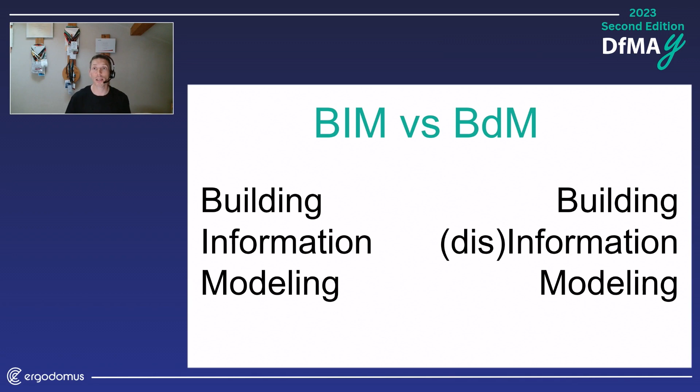DfMA has something behind it, which is BIM, Building Information Modeling, an acronym we're all familiar with. But as my friend Emma from South Africa, who should be here with us today, once told me, BIM is different from BDM, Building Disinformation Modeling. So we need to adopt the digital model, adopt digitization for our structures, push the boundaries, and go for BIM instead of BDM.

Just three more slides before moving to the first speaker of today. When I say digital model, I mean structures, I mean drawings like this one. This is a project we've been working on for many months. It will be one of the biggest mass timber office buildings in the world, in Europe.

It will be about 30,000 square meters, which is about 300,000 square feet. And on this project, we had the opportunity to implement the most advanced digital technologies.

Each element in the BIM model has a name. We can see the assembly sequence, who the producer is, and which truck these elements will be loaded onto. We can check everything, and share this model weeks before having the timber elements on site.

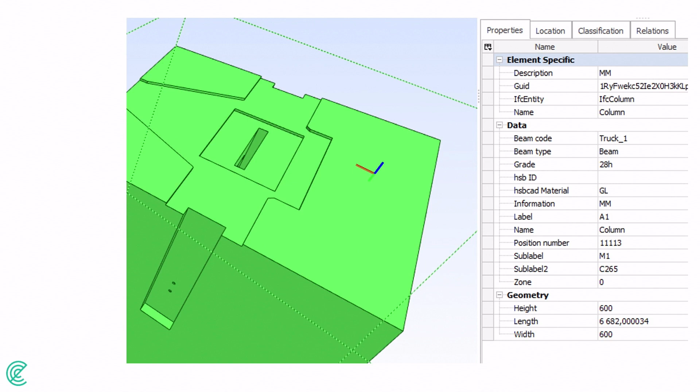We can share this with the designers, with all the other designers, with the developers, with the builders, so everyone knows exactly what they will get on site. No matter how complex the elements are, how big or small, they can check everything deeply and say, okay, this is what I want to get on site.

From the digital model, we quickly move to the real 3D element, which arrives on site a few weeks later. No matter how complex the details are, every single detail is made in 3D.

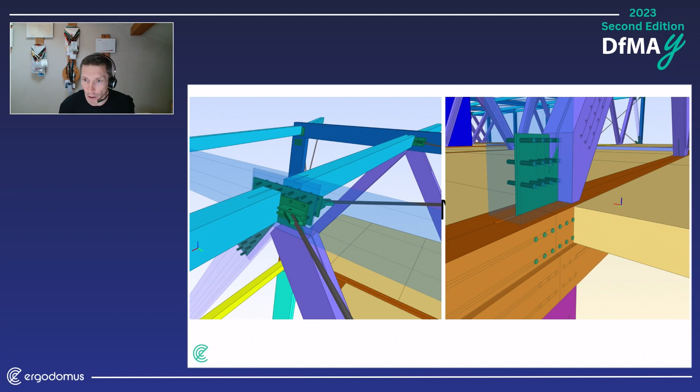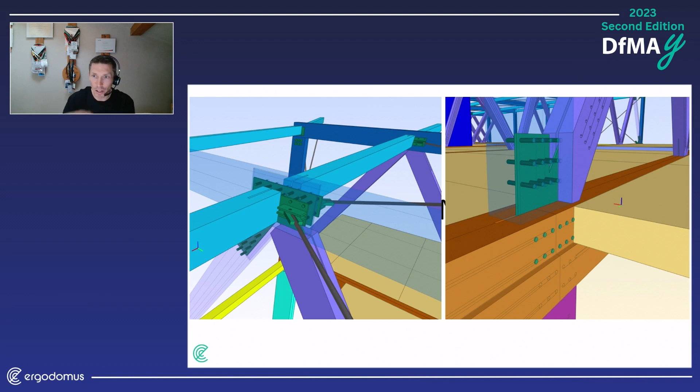This is the most time-consuming part of our job, because we cannot just say it will be something similar to this. Since we create the files for the CNC machines, everything must be much, much more than perfect, because if we draw something wrong, you will get something wrong on site, and we don't want problems on site.

The goals of today, just some of them: Is the building industry ready for the mass timber revolution, the mass timber evolution? Why the digital model? Can we improve the way we design our structures using a DfMA approach? I would like people attending from all over the world to be less skeptical about the use of mass timber, even for high-rise buildings.

One of the acronyms I really like is: what you draw is what you get. Digital model, production with a CNC machine somewhere in the world, and then a very quick assembly without problems. So that is my short introduction.

I don't want to speak more than this, and I want to say one last sentence, written by Albert Einstein: 'The measure of intelligence is the ability to change.' I really believe that thanks to mass timber, thanks to timber, it has really changed things for us as human beings to change. We have the chance to change today, and I hope this conference will convince more people to change the way they build or design.

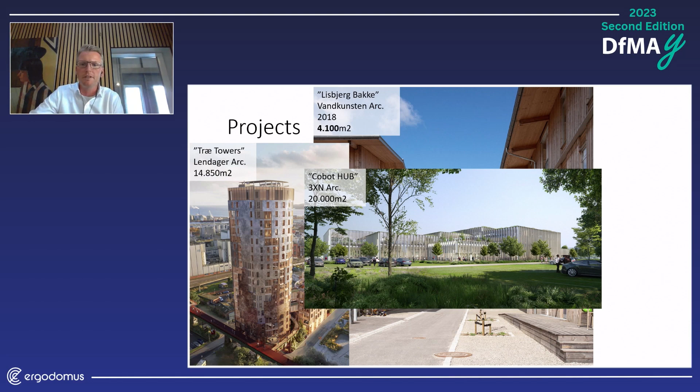Moving on - I have to use the right clicker here - we have this Cobot Hub by 3XN architects here in Denmark as well. It's 20,000 square meters, a hub for robotic technology, based in the center of Denmark, in the city of Odense. That's where Hans Christian Andersen comes from.

Then we have the project Marmormolen, and for the quick people out there, you will realize this is the project that Franco was showing in the beginning of the presentation, the 3D model. I know Franco said it was a bit bigger, because his square meters include the basement that's made in concrete. But the wood part of this is 25,000 square meters of CLT and glulam beams and glulam columns.

This will be a shared office space, with the first floor, the entry floor, being a kind of public space where you have a restaurant, and also the canteen service for the building is located here. This has to do with the fact that this building is located right in front of the waterfront in Copenhagen Harbor, on the north side. It's a pension fund building this project and sponsoring it, you could say.

Now, here we have the Wood Hub by C.F. Møller architects. It's 31,000 square meters and located in Odense, as well as the other project, the Cobot Hub.

This project is interesting, not only based on the fact that it's really big, but this is also where the legislation board for building codes in Denmark is going to be located. So they decided to build a wood building, based on many things, but also to prove that it was possible to do it within a reasonable budget.

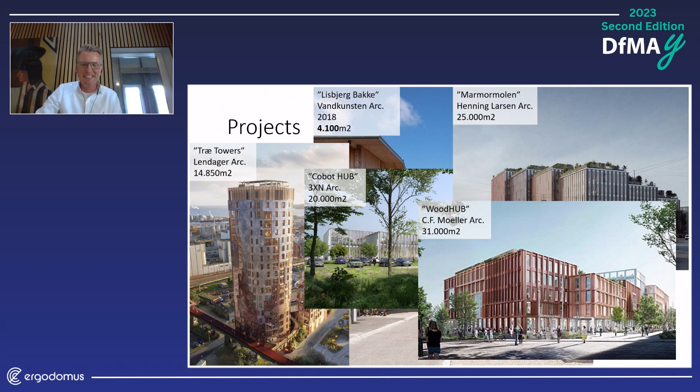Also, regarding these projects, it's showing that all the big architectural firms are aware of the fact that we are going to use wood as a building material in the future. It also shows that all the big engineering firms are aware of the fact that we are going to use wood a bit more in the future. So it's a really interesting journey we are on. So, about the regulations.

In Denmark, we have the BR18. It says building regulation from 2018, you could say, but it's still valid and it's often updated with new stuff. The building regulation in Denmark, the BR18, sets the regulation on a general level for how we design and build buildings.

It takes into consideration airtightness. Of course, when we build an airtight building, we need to kind of replace the air that is stored in the building. So now we also need to talk about ventilation and ventilation systems. And actually in Denmark, it's mandatory to have a ventilation system installed in all homes, no matter the size of the building.

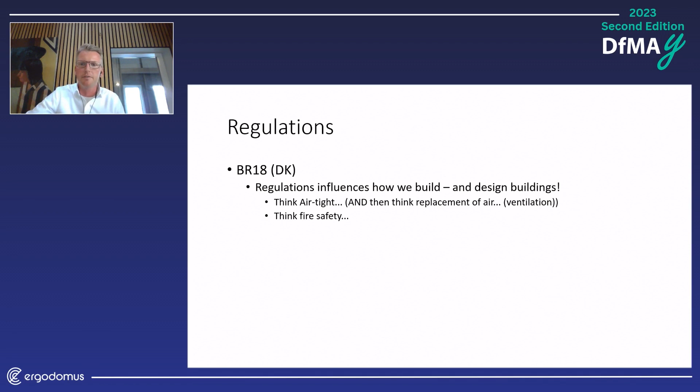It also sets some regulation about fire safety and how we manage that and how we make sure that people can exit from the building within a short time frame. We actually do not consider saving the building. It might sound odd, but we are more interested in saving lives and not buildings, because buildings can be replaced or rebuilt.

It sets some points about sound or acoustic performance of the building. It sets really, I would say, high demands in the acoustic performance of a building, so that you do not hear your neighbor snoring or walking on the floor or whatever it might be.

It also sets some boundaries, you could say, about the daylight, how much daylight is in a room, and it's set that a certain area of a building should be glass, or a certain area of the building can be glass, nevertheless. So it's two takes on the same matter, you could say.

Thermal insulation is also a big thing here in Denmark. It has not to do with the harsh winters we have, because we don't. We have, in general, very mild winters. Of course, if you go to the north of Norway, they have very harsh winters, and also the north of Sweden or Finland has harsh winters.

But this comes out of the oil crisis in the 1970s, 80s, where we had a high consumption of oil heating our homes in Denmark. And from that day on, you could say the building regulation was very strict when it comes to thermal insulation of buildings here in Denmark. And of course, one of the biggest companies in the world producing thermal insulation is a Danish company, so it might have something to say as well.

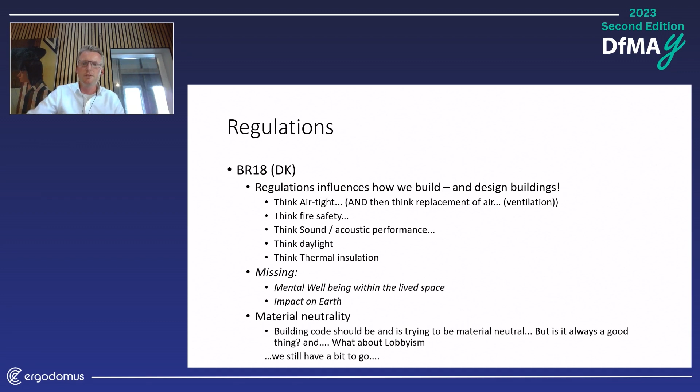Okay, I need to close, I guess, yeah.

Future scenario, I'll just wrap it up really shortly. This is how the market will be in the future here in Denmark. In 2023, that's where we are now in 2024, we set regulation for new buildings below 1,000 square meters and above 1,000 square meters. Below 1,000 square meters, we do not have any boundaries right now, but when it comes to buildings above 1,000 square meters, there will be a limit on the CO2 emission for the building and the material that you use in the building. It will be 12 kilograms of CO2 per square meter based on EPDs, product-based EPDs.

In 2025, we'll move to 10.5 kilos, but please note, now it will be for all buildings, also residential buildings, single-family homes, etc. Moving on to 2027, 2028, we'll go down to 9 kilos CO2 emission per square meter. And coming to 2030 it will be around 7.5 kilos. These numbers are just temporary because they are meant to be adjusted in 2024 when we have some more facts on the table on how the buildings that we are building today are performing in the future.

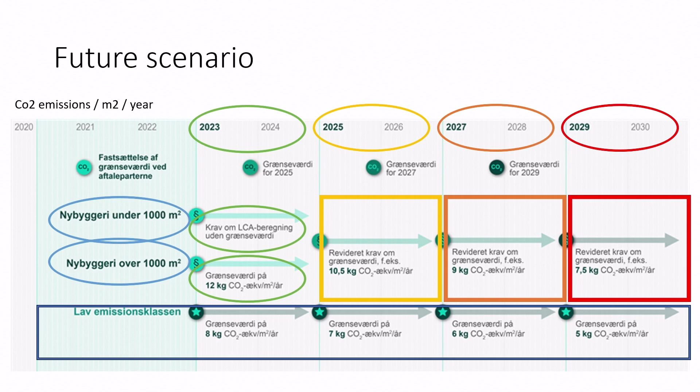Then we have the low emission class that is here. That's not mandatory. That's for you to choose if you want as a building owner. And here we go to 5 kilos CO2 per square meter in 2030. That is the idea today, but this will most likely be lower.

The risk here is that measuring can make you blindfolded. If CO2 is the only fixed point you have, you might risk missing out on the bigger picture, because using more wood means, okay, we store more CO2 in the building, so we have a smaller CO2 impact. But is this always the best? I'm not sure it is, because when wood is incinerated after end of life, we will emit CO2, and we only have a limited wood supply available. So we need to stretch the material a bit to cover all the buildings that we would like to build in the future. And I would just say rules are not better than the persons implementing them, and it does not take away the responsibility of thinking yourself.

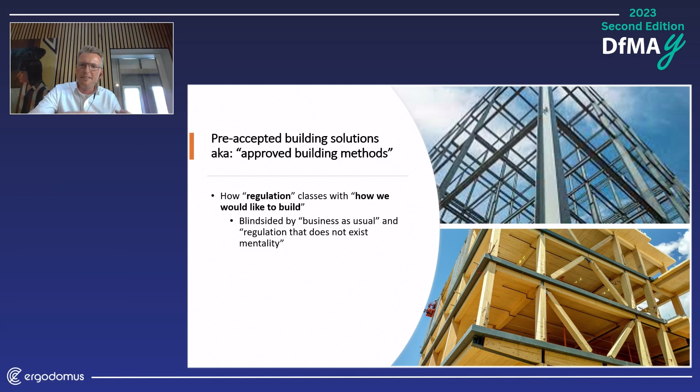In Denmark, we have the pre-accepted building solutions, aka approved building methods. And this is how building regulation clashes with how we want to build, because you might see the two buildings on the picture here. One is a steel frame and one is a timber frame. Business as usual is the steel frame structure, and the thing we want to build is the timber frame structure. But it is not business as usual, and the building code is kind of not taking this into consideration, because one building and another might seem similar, but in regard to the building code, they are not.

Even though the building code is material neutral, we have a saying that wood is a combustible or burnable material.

2 minutes left, I'm told.

Okay. Meaning that if a fire occurs in the building, it will collapse. We have steel and concrete on the other side, and they are non-combustible materials, meaning that if a fire occurs in the building, they will theoretically not collapse. This is not the truth, of course, because steel, when it gets heated up, will start to collapse. But it's just a minor thing in the building code, making it extremely difficult to use wood as a building material, especially in tall buildings.

So the bubble question, now I'm almost there. The question I get asked the most here in Denmark is, aren't you afraid that it will all fall to the ground? Now the market is unstable. We have a war going on. We have a Russia situation and so on and so forth. But my answer to this question is nope, not at all.

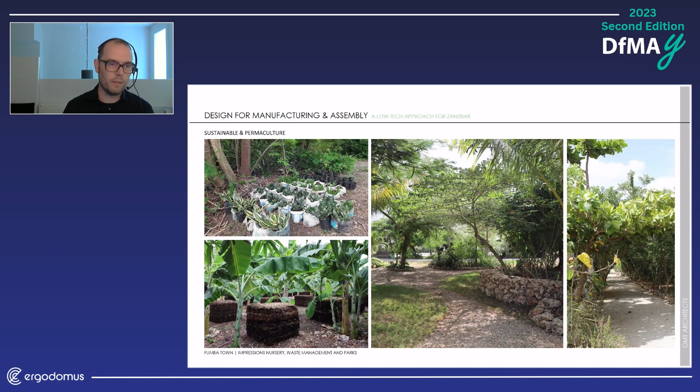And that development was, of course, a lot about creating a new community, creating a green community with a lot of permaculture, with waste recycling, all these things which we are all aware of and which are great when you start a new city. But he wanted to go a step further than that, and that's where we came into play. He wanted to go from best practice to innovation, and he was wondering how to do that and basically said, okay, I have to give people choice.

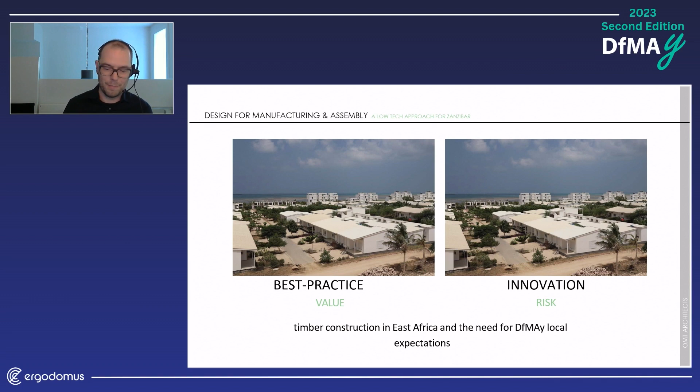So you see the same image here on the screen, and some of these buildings are best practice and the others are innovative. So some of those represent a value and others are a relatively big risk. And that basically is down to the way they were constructed. At that time, with engineering only, they said, let's just give people an option to buy either a stone house or a timber house.

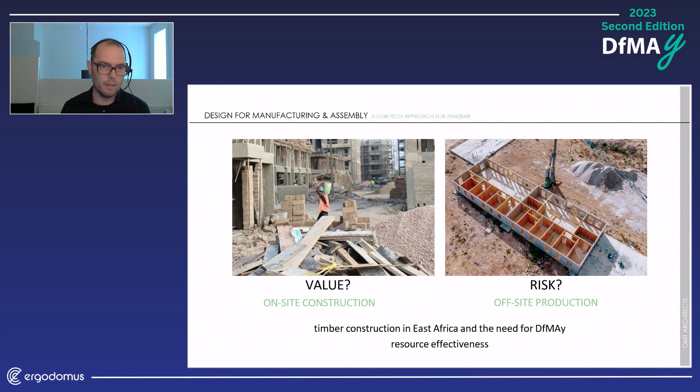And nobody knew if that would work, and nobody knew if it was possible in Africa in this context on an island. Nowadays, we've seen that 50% has been built in timber, and we see a lot of benefit in that. Of course, with the timber construction, we not only tackled the better production methods by taking this offsite, therefore reducing waste on site, but we also helped to improve construction safety.

On the left you see, and this is really 100 meters apart, a conventional construction where they take the castwork away by hand, and on the right is our pop-up factory where we off-site produce these timber elements. We're in a tropical context, so we have a shaded, weather-covered space where the wall elements are produced to go on site.

So for us, it's clear when we look at the demographics in Africa, with rapid demographic growth over the next 23 years, and I summarized here a couple of key criteria, we will see a population increase by 1.2 billion people on the African continent. Now, if you consider that an average household size in Africa is around 5 people, that means that in the next 23 years, we need to build 240 million houses to accommodate only those people. And we still have a huge backlog to also fulfill.

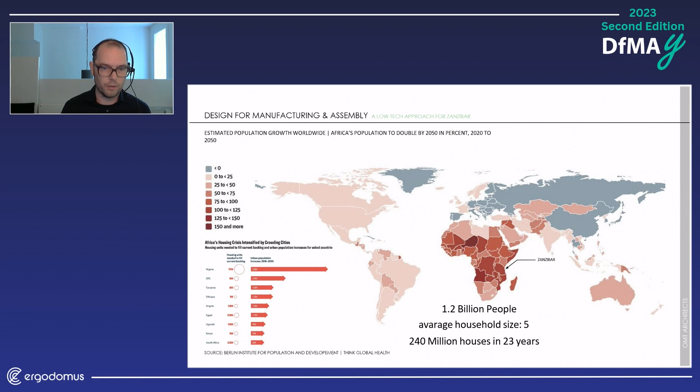And then a lot of people, of course, think Africa, you know, that is a lot of desert. That's right. In the northern part of Africa, we don't have many trees. But actually, if you look at the amount of trees in Africa, you will see that there is a bigger forest coverage in Africa than in Asia.

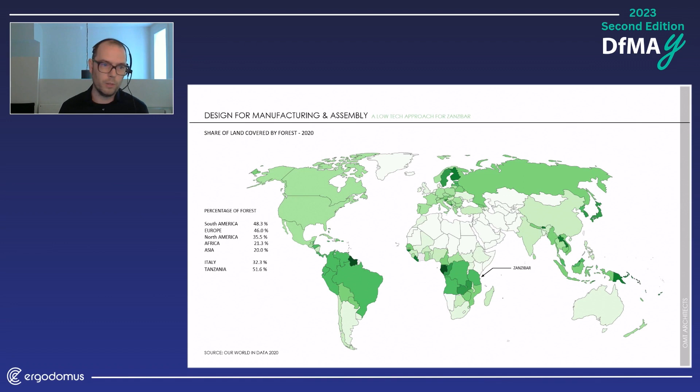Now, a lot of people will say that is all primary forest, we should not touch it. And there is of course primary forest, but for example, in the southern part of Tanzania, where we have a forest coverage of 52% in the country, we have huge plantation woods, and they are elevated, so it's pine and eucalyptus trees mainly, for which the pine would be perfect also for construction. It's currently not used for that, so how can we change that?

So if we want to reintroduce that, we need to look at the whole value chain, especially in a context where this is not done to that extent, and where there's no timber industry at the moment in relation to, for example, what we know in Europe or in North America.

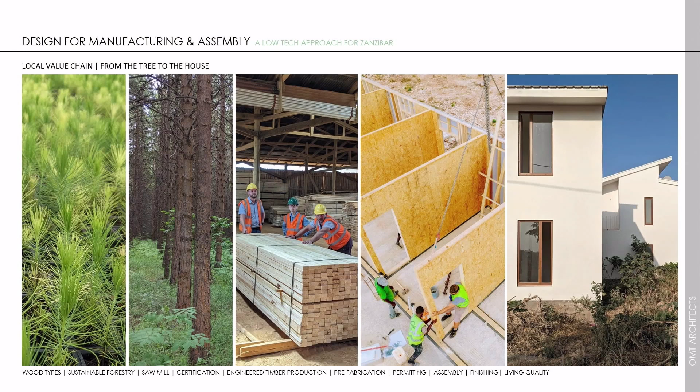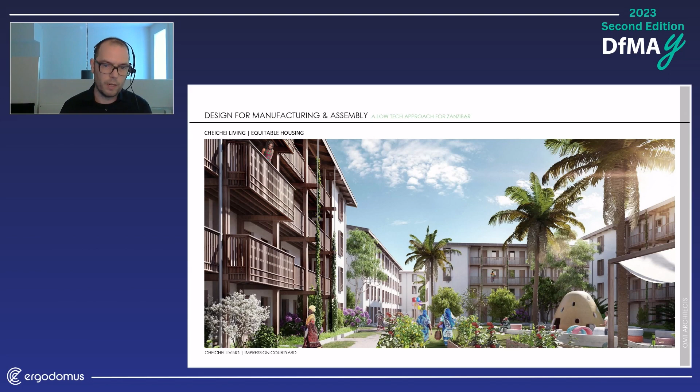So when we start to reinvent projects, and I will talk a bit about this project we're doing because this is equitable housing really focused on the local market, we look at those traditional means and try to reinterpret those into a modern context.

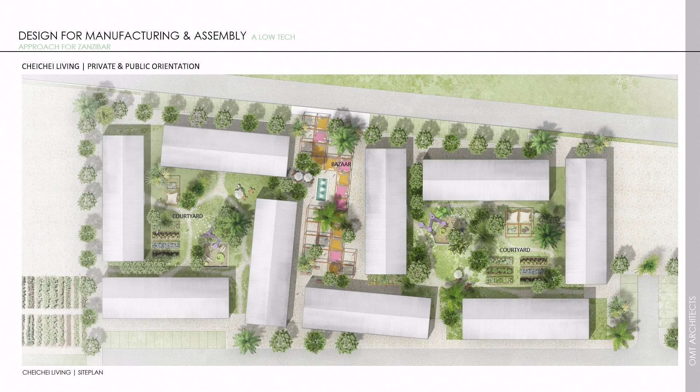So for this building, we have two sides of the building. One side is residential, the other side is more commercial, because we think that not only do we need to look at these buildings as part of an engineering effort, we need to think about these buildings as part of a community, and this community needs to be diverse. So we cannot build a single building for one kind of community.

We need to incorporate different people, different generations, and we need to mix living and working conditions. So we created a building which can accommodate everything from workshops to studios to apartments. We have 64 different typologies which we can integrate in one building.

And then of course, it comes down to the fact, how can we now make this building effective? These studios are sold for 10,000 USD for a studio, so we have to be cost effective, and we want to build this with timber. Of course, we also want to show a bit of that timber inside. So it's a big challenge. How do we bring that together? And of course, the way we bring that together is down to looking at how can we optimize the building, and how can we optimize the elements we use for constructing this building.

And that of course starts, especially when we talk timber, with fire. So we need to overlay our fire life safety approach. And Kenny also mentioned it, we rather want to save the people than to save the building. But we need to overlay that approach also with our structural items, because if we do that, we can be very effective.

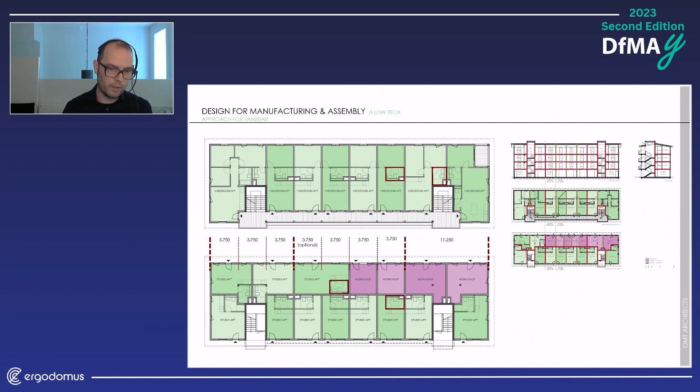And then on top of that, of course, we can use a modular approach. For example, here in red, you see the bathrooms, which are all the same hardware. We even use that for other projects, no matter if that's a 10,000 USD studio or a $500,000 USD villa. It still has the same hardware. We just changed the tiles and the fixtures. So that is a simple approach we can use there to optimize the building.

And then we have the great opportunity in Africa, where we're developing a whole city, to also look into how can we then optimize our buildings, how can we go from the first initial intentions to a more optimized approach. We as architects really believe that we should minimize our resource use and that we use as much local material as possible. I just called out here one single thing we looked into.

So for the first generation of these buildings, we used a composite floor with notches into that floor with smaller elements. And when we seen that coming to site, and also in the manufacturing process, we seen that it's all single items. So we were thinking about how can we simplify that, and we went from that singular approach with composite floors to a slightly less cost-effective floor build-up where we have only a CLT panel, but now all of a sudden that CLT panel can be 3 times the size. It can exactly fit in the container, and it's much simpler to install.

So that's what we have on investment cost as an add-on. We save on the construction side by simplifying its implementation.

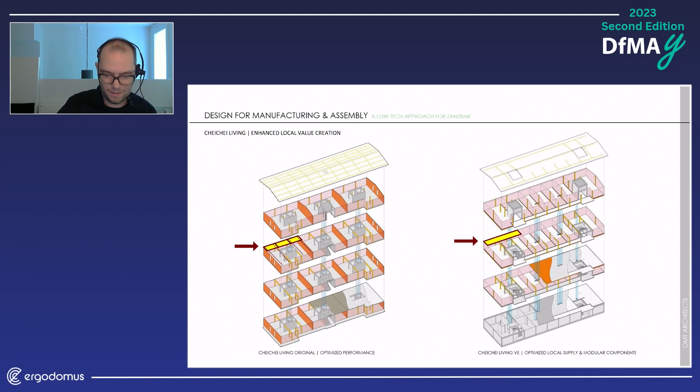Now I'm waiting for the next slide to come. There it is.

So from there, we then moved, and on the left you will see the first iteration, the first generation of this project, and on the right, you see the second iteration of this project. This is the connection between a conventional build core, because of fire reasons still conventional, also for the permitting authorities, a lot easier to deal with than with timber, where they don't know much about. And then you see some details in Europe or in North America we would not apply, but we do apply in the local context, because we have a large discrepancy in tolerances between conventional structure and local structure.

And also on the left, we use South African produced CLT, which burns a lot faster than European produced CLT. And therefore we had to take additional precautions in terms of how we created the support for that ceiling. So all of that led to a detail on the left, which was quite complicated.

And when we now came to the second generation of that project, we simplified that by actually stepping away from CLT for parts and going back to prefabricated stick-built elements. A bit wider, double wall, but more effective, more simple, and also more cost-effective. So we actually managed to reduce the building costs as well. And I think the detail shows how much easier it is.

And something we gained by doing that as well, going from the composite floor to the general floor, is that we don't have the complicated detail where we have to tie in the rebar of the composite floor into those conventional built cores. So a lot of that is really design and redesigning it after the experience on site.

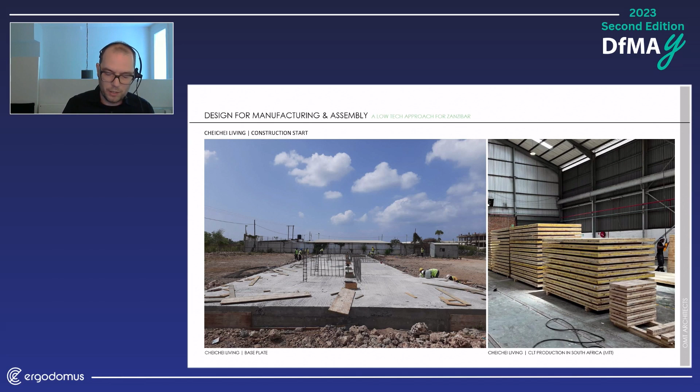So this is currently the construction site. The timber has all been produced. We hope to assemble the first building towards the end of the summer. We already have 8 more buildings coming up, and eventually that should be around 30 buildings. This experience is based on other projects we do.

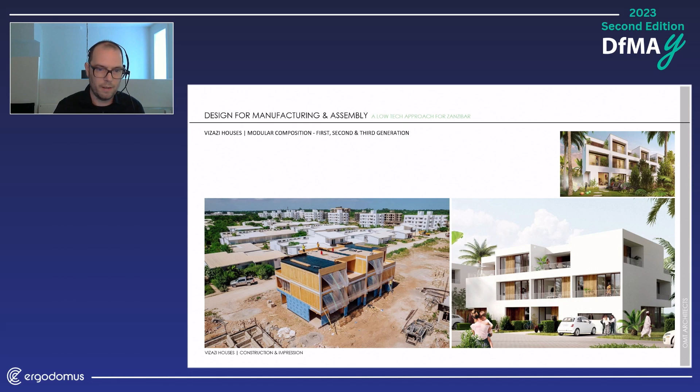We do a lot of different size buildings. We started with single story, then went to a 2-story approach. This is a 3-story full CLT building that we will never do again, because it's just not cost effective enough in this context.

This was one of the first projects which really kicked off this development. We're now building the 20th building. This is a very simple approach where you can choose between a room apartment, 1 bedroom, or 3 bedroom, all based on a modular approach, prefabricated on site by a pop-up factory, and then just assembled right next to it. Very straightforward — a building stands within more or less a week.

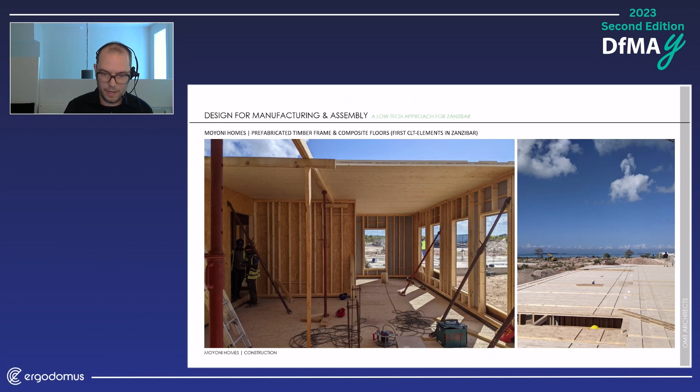The only thing is that after we assemble it, we build the staircase in concrete using a conventional method into the building — the other way around from what you'd normally expect. Here you see it's a very simple stick build, and we still use composite floors, and that's the interior of the finished building.

We do a lot with timber, but at the same time we also look into passive design measures, which are so important when designing buildings — things like cross ventilation and permanent sun shading, which enhance the interior climate and also help the timber, because good ventilation is key for timber in an interior exposed situation.

Still, it's nowhere near the 240 million houses we need. For example, in Tanzania, that would mean we need to build more or less 1 million houses a year. We are maybe providing 1,000, so we need to scale that up 1,000-fold going forward. It's a huge, enormous task. We are trying to contribute a bit to that, and unfortunately there are still very few people working in Africa, but I think it's in our best interest to look into Africa, because there is such a big demand due to the demographic development.

And that also includes not only low-rise — we are also working on a high-rise building, which will be a landmark project for this development, starting construction next year, and looking beyond that to further develop this approach throughout the continent.

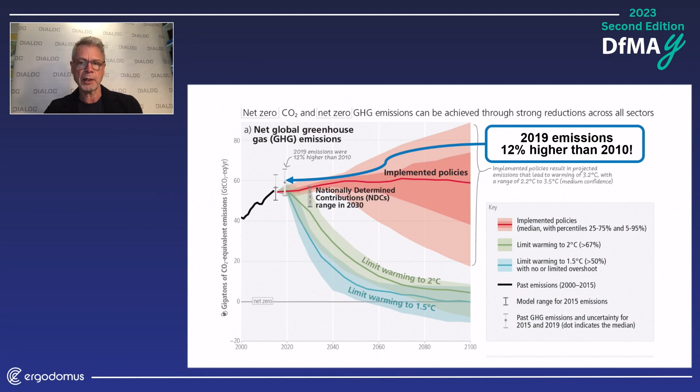About 6 weeks ago, the latest IPCC assessment report number 6 came out, talking about where we stood in terms of emissions of carbon dioxide and their potential impact. And it wasn't good news. Between 2010 and 2019, emissions were not moving down, they were moving up—in fact, 12% greater in that time. I think Greta Thunberg sums it up: our house is on fire.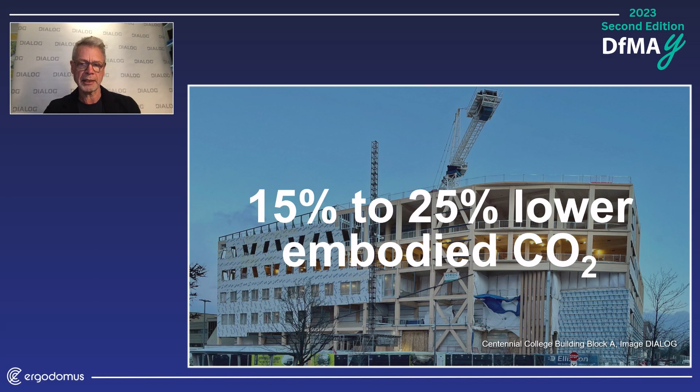So what can we do as an industry? I think one of the clearest things we can do is build with wood and build with mass timber. This is a project I'm currently working on, a community college. To give you a sense of how powerful wood is as a climate tool, it has 15 to 25% lower embodied carbon, lower embodied CO2. And 1 cubic meter of wood stores 1 ton of carbon dioxide. So mass timber buildings, wood buildings, are storage vehicles for carbon.

So what have we been doing as a practice, DIALOG as a practice, over the past decade, to give you context for the project I'm going to show you? About 14 years ago, we started with this small forest research center, a 1-story mass timber building. About the same time, we designed the UBC Student Center, a hybrid of mass timber, steel and concrete. This is more recent, on the boards right now: 2150 Keith.

It's a commercial office facility, mass timber structure. And this one, which is just finishing construction—I showed you the under-construction view before, and now, this week, it's finished. It's a 6-story college facility, all mass timber. And this is a project we just won and are starting to design: the Seneca Polytechnic Health and Wellness Center, 100,000 square feet of recreation, fitness, and well-being program.

So I think you might have noticed something missing from all these examples: tall buildings. So how can we integrate mass timber into tall buildings? Hybrid wood towers.

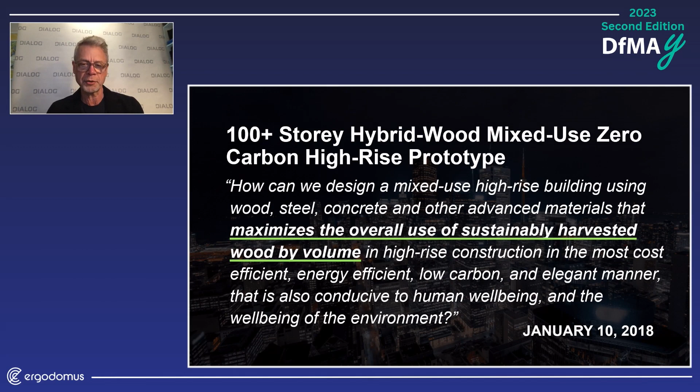In 2018, a number of our partners at a DIALOG annual general meeting got together and said, what are we going to do? How can we make this happen? So we set a big, hairy, audacious goal of designing a 100+ story hybrid wood mixed-use zero carbon high-rise prototype. We asked: how can we design a mixed-use high-rise building using wood, steel, concrete, and other advanced materials that maximizes the overall use of sustainably harvested wood by volume in high-rise construction, in the most cost-efficient, energy-efficient, low-carbon, and elegant manner—one that's also conducive to human well-being and the well-being of the environment? That was our starting point.

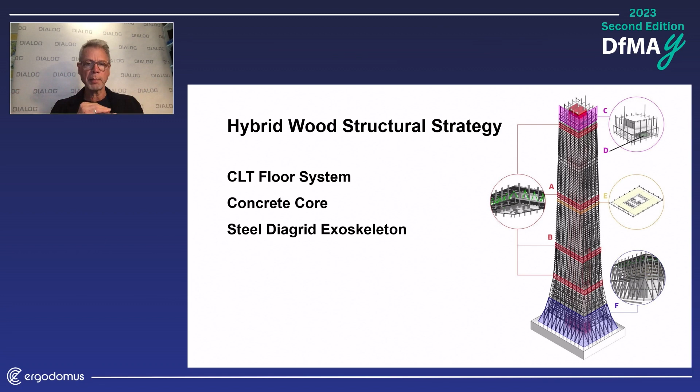The most important thing we discovered as we started our research was that in high-rise buildings, 60% of the building materials are used in the floor systems. So we looked at designing a hybrid wood structural strategy where the key impact is how we use CLT in the floor system. The exterior system would be a concrete core with a steel diagrid exoskeleton—very typical of a tall building. But in this case, the magic is the CLT floor system.

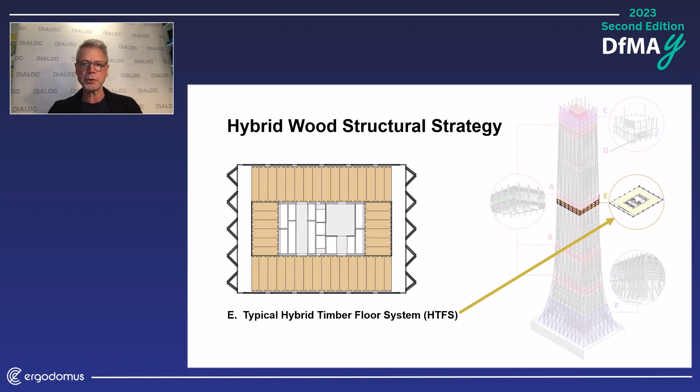This gives you a sense of how that works. You can see these 10-foot by 40-foot floor panels arrayed around the core out to the steel exoskeleton. These panels are set up as a hybrid of CLT plus post-tension steel tendons—2 post-tension steel tendons in each 10 by 40 panel. So you start with a 10 by 40 foot 7-ply CLT panel.

Why this is important and very innovative is that typically mass timber, CLT, spans about 20 to 30 feet at most. So you have to have an intervening beam and column if you want a typical office floor plate, which is around 40 feet from the core to the exterior wall. So we asked: how do we make a CLT floor panel that allows us to have that 40-foot length? And this is how we came up with it.

And the 10-foot is the dimension required to put on a truck. Also, these things have to be lifted up into place by a crane.

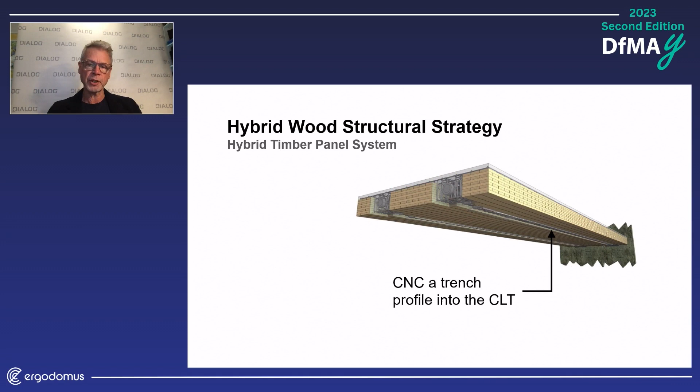So you basically CNC a trench profile for the panel. You then put in the post-tension conduit as well as the rebar around that to connect it to the CLT panel. Then you put a steel reinforcing grid on top for the concrete that will go on the floor above for acoustic purposes, as well as for setting in electrical conduit. This gives you a sense of what it's going to look like. So you have all the mechanical systems going on at the core, and the ceilings are clean, with no intervening wood beams and columns.

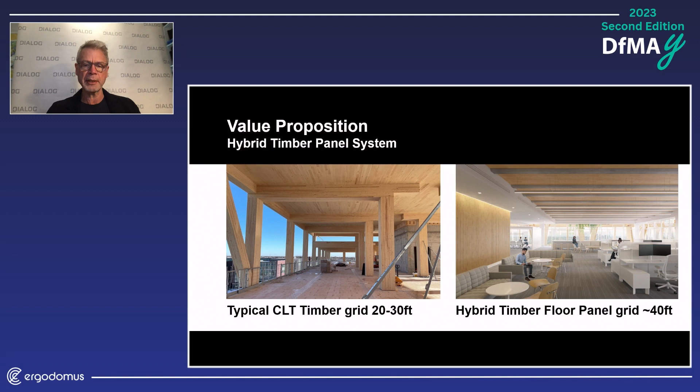And this gives you a sense of the value proposition. Here's a typical CLT timber grid, 20 to 30 feet, and here is the hybrid floor panel grid of 40 feet.

So structural testing. This is not just an idea. We teamed up with FP Innovations and LS Dawn as partners in order to test the panels to see that all of our theoretical and engineering calculations were borne out in reality. This is LS Dawn's plant out in Thamesville, and they are now building various component parts to be tested by FP Innovations.

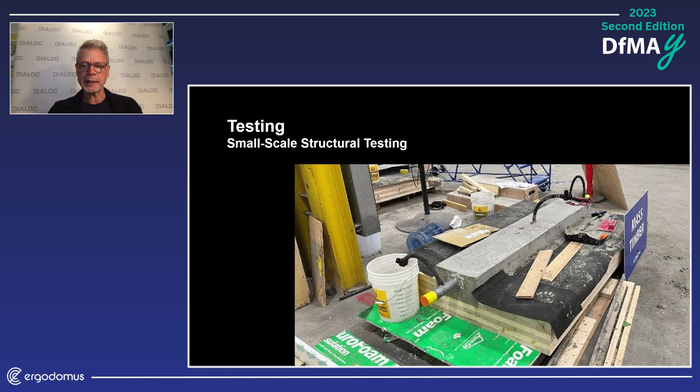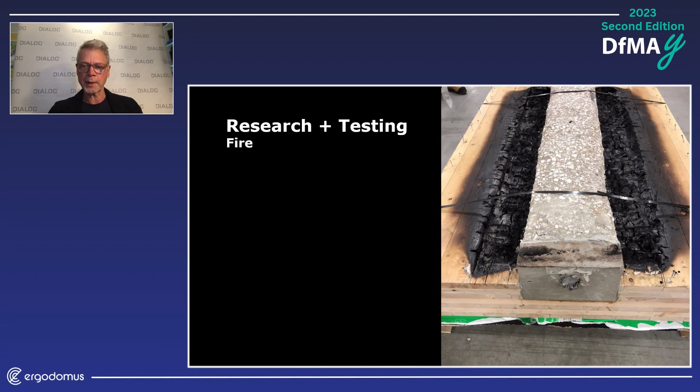This gives you a view of one of the pieces of rebar inside the concrete reinforcing there. And this is what it looks like after it's been tested in the burn chamber. So it meets all of the requirements, and it proved to work.

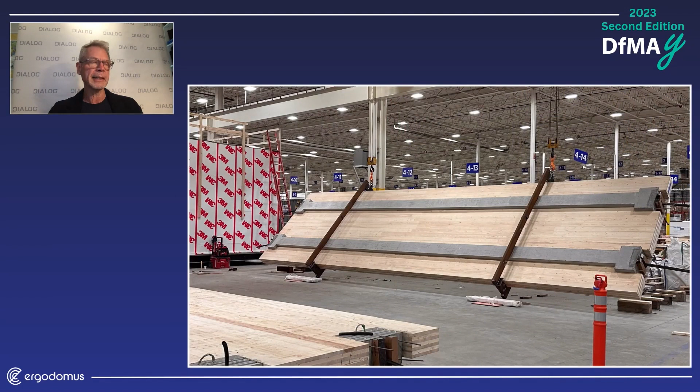This now is them pouring the concrete around the post-tension conduit and for the whole panel itself. So there it is poured. And then this thing weighs the same as 15 F-150 trucks. Turning it over, there it is. So these are, we built 2 of these.

And to end off by saying, some people want it to happen, some people wish it would happen, others make it happen. And that's our job. Thanks.

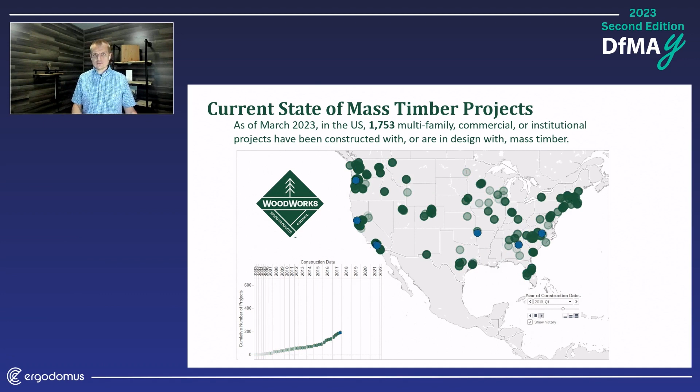This is just a quick map showing really the progression of mass timber construction here in the US over the past about 15 years. And you can see really a significant increase in the number of projects. This is showing the number of projects and where they're located, really since about 2016, 2017. So really the use of mass timber has grown significantly in that amount of time. And we're at now about 1,750 mass timber projects in the US, either completed or under construction or currently in design.

And one of the aspects that I work on here at Woodworks in particular is taller projects. So very much tied to what Craig was just covering in terms of supporting the use of mass timber in tall projects. Just over the past couple of years, we've seen that number grow from just one tall mass timber project here in the US to now having the world's tallest mass timber building in Milwaukee, the Ascent Tower, sitting at 25 stories. And there are a number of other tall projects going on now.

And I think one of the things that's really exciting and encouraging about that is specifically seeing the use of mass timber in housing, in multifamily housing. Leander showed a lot of exciting things that are happening in Africa with the use of mass timber in housing. And we're seeing similar, especially on the affordable housing side of things, which is really good to see. So that's an example of a project there at 8 stories of mass timber. And then this is a project currently under construction in Oakland, California, which when it's done will be 18 stories total, again, providing multifamily housing.

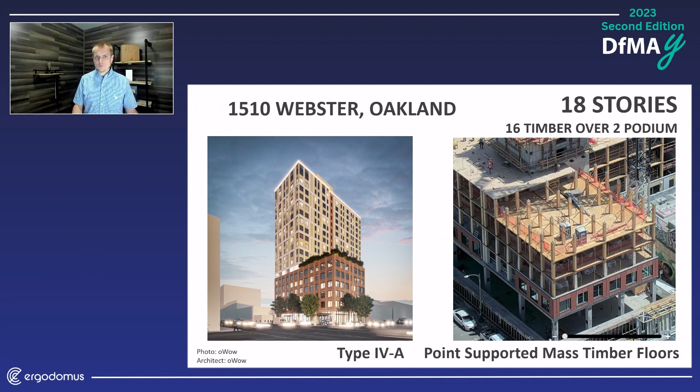I don't have time today to go through the nuances of all of these types of projects, but suffice it to say that the structural systems on all of these are actually quite different. And that's what we'll cover in the next 10 or 15 minutes: how to understand what could be the best structural system for your project and what are the cost implications of designing it one way versus another. This talk is going to be focused more on US building practices and codes, but I do think a lot of it translates across the globe. In the US, our project designs are essentially based on the International Building Code, which is updated every 3 years.

Stepping back, I have a structural engineering background, and thinking about how we would normally go about designing a building structurally, let's say it wasn't mass timber, it was some other building material. Oftentimes the architect would generate a set of preliminary floor plans. And then as the structural engineers, we would basically have to figure out what walls can we hide columns in, for example, and how can we lay out a structural grid that may not be a perfect grid, but basically allows the architect to create the interior spaces that the owner needs, while we try to hide as much of the structure as possible.

Of course, we know with mass timber, it's really the opposite, right? We want to expose the structure, but because we're doing that, we also want to design the structure in a way that's more efficient. So thinking about that progression, what's the first step, what's the second step, what I would suggest, and this is just a possible design route, I'm not saying you have to do it this way, but I do think there's some efficiency in this, is to start out by understanding what the owner needs from a building size and layout perspective. From there, choose the construction type that is on the lowest end of the spectrum that still works for the building size.

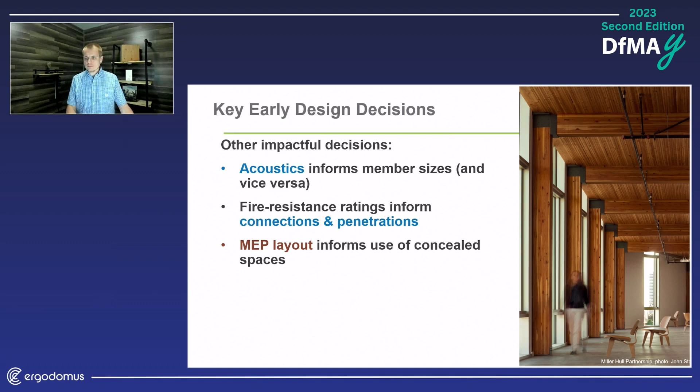And again, the whole point of this is to dial in to optimize the fiber count, the connections, the piece count, all of the things that we'll talk about in terms of what are some actual metrics we can use to gauge these things. Of course, acoustics, MEP integration, lateral system selection, working within the capabilities of a given manufacturer are all very important in this context as well.

So this is a chart, if you're familiar with the International Building Code, that lays out the construction type options based on the size of the building that you're working on. And I would say too, with mass timber, don't assume that there's going to be a single best option. There's usually multiple options, unless you're a tall building in excess of 7 or 8 stories. But if you're in the 1 to 6 story range, there's usually several options for construction type. So I would strongly encourage you to assess all of those options and see which one works best. That's also something that we do a lot of in terms of our assistance at WoodWorks.

So again, construction type, then once that's chosen, that dictates what the fire resistance ratings are. Those fire resistance ratings then have an impact on what is the most efficient size of the members. Because if you're looking at, for example, a 1 hour fire resistance rating, and we're designing, say, CLT floor assemblies, it's usually difficult to get a 1 hour fire resistance rating on a 3-ply CLT member because of its relatively thin depth. So that might then push you to look at, say, a 5-ply CLT member.

So if you already know you're going to be based on a 5-ply CLT member, then you can start to see, based on the structural properties of that 5-ply and the vibration characteristics, you're probably going to be looking at floor spans in the range of, say, 14 to 17 feet. And I apologize, I didn't do the conversion to metric units here. So if that's the case, prior to laying out the grid, you already know you want to be in that range of 14 to 17 feet, if at all possible, to maximize the spans of the timber elements based on having to meet a 1 hour fire resistance rating. So there you go.

So some examples of how you would actually implement that on a project, because a 14 to 17 foot span doesn't mean that the columns have to be 14 to 17 feet apart. It just means we have to have beams at those dimensions. So one example, this is an office building in Denver, and the client here wanted a 30 foot by 30 foot grid to meet the interior space layouts. They were able to use a type 3B construction, which has a 0 hour fire resistance rating. With a 0 hour fire resistance rating, you want to use the thinnest panel possible to minimize the fiber count.

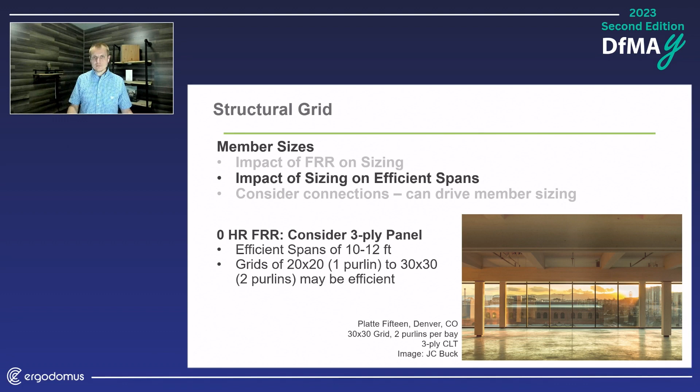Then what this design team came up with was the framing configuration that you see here, which is beams at 10 feet on center, supported on girders that span the full 30-foot dimension. And so those purlins, or those intermediate beams, also span 30 feet in the direction. But again, minimizing that CLT to a 3-ply for fiber count optimization.

And then if you are doing a project like this one here, which is now a type 3A construction, which has a 1 hour fire resistance rating requirement, again, 1 hour, probably start looking at a 5-ply system in this case, which is about 7 inches thick. A 5-ply system then is, like we said earlier, efficient spans in the range of 14 to 17 feet. So then you might look at a grid.

If again you're going back to that 30 by 30 grid, you might then just have beams at 15 feet on center. So one intermediate beam. You still achieve the same grid, the same column dimensions, but you're reducing the number of intermediate beams or purlins, which of course has an impact on the piece count as well.

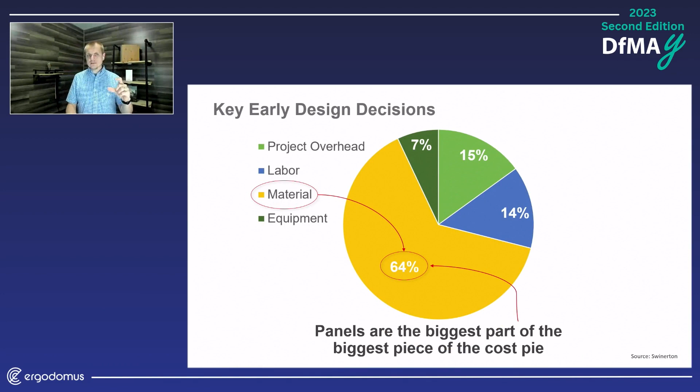So as I've mentioned there a couple times, I think it's important to really dial in that thickness of the panel and optimize that based on the required fire resistance ratings. And the reason that I think that's so important is because the panels are the biggest part of the mass timber cost package.

If I go back here for a second, you can see this is a chart. Whoops, something's going on with the slides here. That's okay. Essentially a chart showing where the majority of the cost of a mass timber project comes into play, and that is tied to the materials themselves. And the panels usually make up about 70% of the volume of fiber in a mass timber project. So starting out by minimizing those panels to get the most efficient system is where I would start.

And just some examples of what that looks like. Say we have a 30-foot by 25-foot grid. It's a type 3A, so it's a 1 hour fire resistance rating. So you can see we have one intermediate beam to get the span of a 5-ply to 15 feet on center. One of the metrics that I've seen used, I think works quite well to gauge the efficiency of a given mass timber design, is looking at the volume of timber on a per square foot basis.

So if you add up the total volume of, in this case, a 5-ply CLT, those beams that you see at 15 feet on center and the girders, you get a total volume here divided by the 30 by 25 area of 0.73 cubic feet per square foot of building. And again, you can do the conversions for metric units.

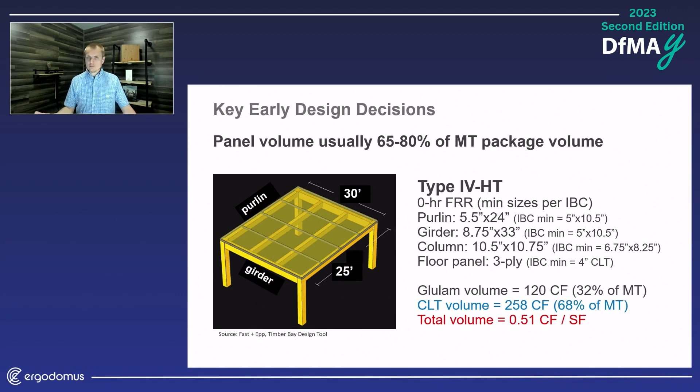Now, if we look at that same grid, but let's say we are now construction type 4HT, the option now is to go with a 0 hour fire resistance rating. And so what we're going to do is pull down that CLT to a 3-ply instead of a 5-ply. So we've reduced the CLT thickness. We've added an extra beam now. So now we have 2 intermediate beams, but you can see the net result is a pretty significant reduction in total timber fiber. So now we've gone from 0.73 on the previous example to 0.51 here.

So it's something to think about: minimize the fiber count, but increase the piece count. You kind of have to play that balancing game of what is most efficient for your project. But I think these examples provide you some ways to assess that. We do have a resource on the WoodWorks website related to vibration.

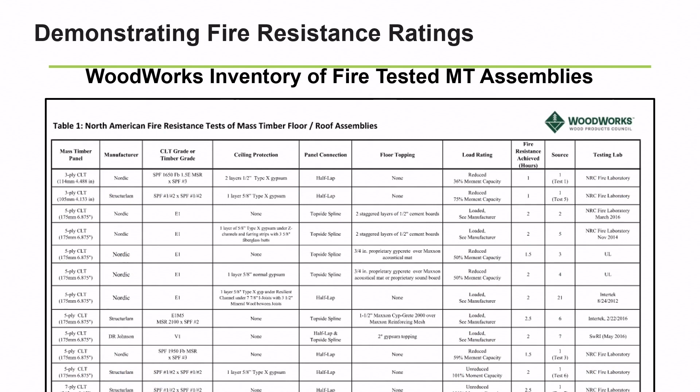And then in terms of fire resistance design of mass timber, I think this is fairly common in the US as well as in other locations. Testing is one of the most common ways of demonstrating that the CLT or the glulam that you're using has been validated. And we've combined all of the known, I think the slides are just kind of skipping ahead on their own. That's okay. All of the known fire tested assemblies.

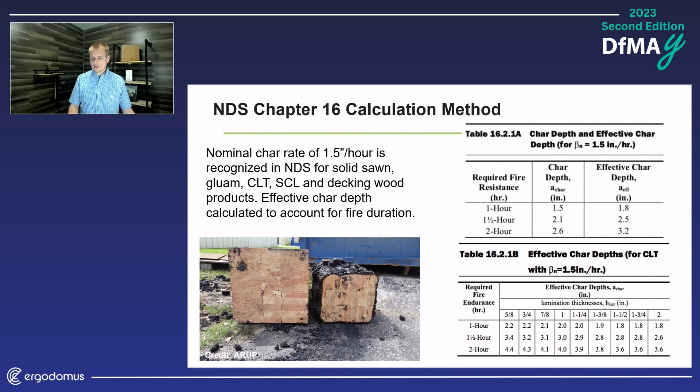We're aware of over 50 of those currently that we've combined into an online database of mass timber fire tested assemblies. And then there's also a calculation-based method, based in the NDS, the National Design Specification, which allows you to calculate up to a 2-hour fire resistance rating using a nominal char rate of 1.5 inches thickness of wood per hour of fire exposure.

And that essentially is just doing 2 checks: one structural check pre-fire, so the full thickness of the timber member, and then you reduce that timber member based on the fire endurance that's required and the thickness of the char that develops there. That leaves you with a thinner member of timber, and you're checking that in the post-fire condition, but you are allowed to increase the properties on that member as well.

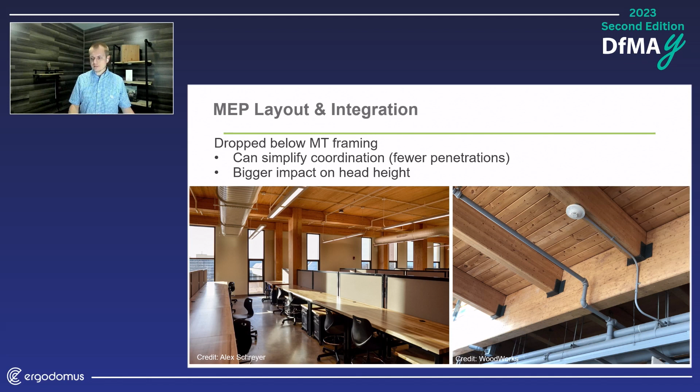But of course, this does have an impact, not just structurally on those beams, but also from a fire perspective, right? If those were 1 or 2 hour rated beams, like you see here, if you have to account for the fire exposure within those beams, as well as the total size of the beams themselves, the impact of a 1 or especially a 2 hour fire endurance on the size of those beams is quite significant.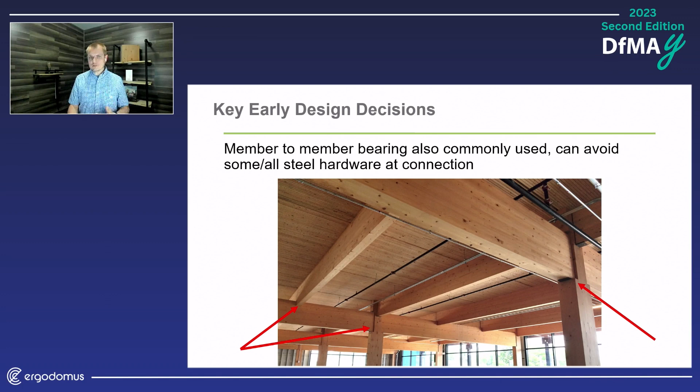And then on connections, there's some common proprietary systems where you're fully concealing the steel hardware of a hanger. There's custom fabricated options, and then there's something like wood bearing. So there's nuances and differences with all of those in terms of the cost of the connection, the aesthetics of the connection, and the structural capacity and fire capacity of those connections. And we've consolidated some of those into an online index of mass timber connections on the Woodworks website.

So just in closing, to leave you with some of the metrics that we talked through that I think are helpful to assess several options on a mass timber building. It's again the volume of timber on a per square foot basis. Maybe run 2 or 3 scenarios and see which one gives you the lowest volume per square foot. Penetrations, we talked about the impact that penetrations through beams, or even through panels, have from a fire perspective. But of course, that's also something that has to be coordinated and fabricated by the manufacturer.

So maybe again, look at several options and understand how many penetrations each option gives you on a per 1,000 square foot basis. And then the last thing is pick points. How many actual picks of a crane does one system require versus another? Because like we saw, there may be a trade-off, less volume of timber, but more pick points. So it's just assessing those options, not saying that one is the best, but this gives you metrics to actually track and compare from one building to another, or even several options within a given building.

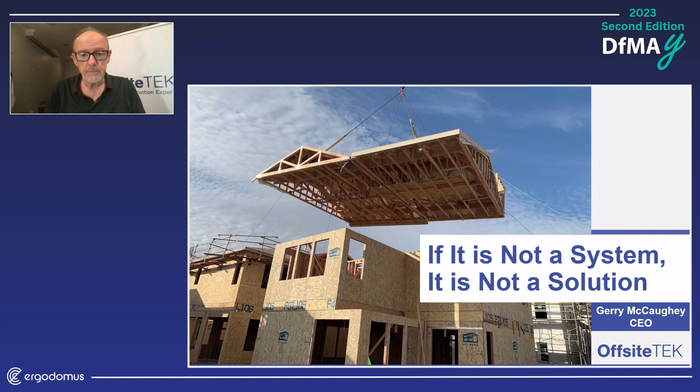That you actually save money when you use it as a total system. So a little bit of my history. I was a co-founder and CEO of a company in Ireland called Century Homes, which we sold to Kingspan, many of you who may know, back in 2005.

But when we started that company in Ireland in the 1990s, just to put this in context of where mass timber can go in a short period of time, in the 1990s, less than 2% of all the houses being built in Ireland were wood frame. 98% of them were being built out of concrete. That's low rise, mid rise, high rise. It was concrete dominated.

But then what happened back in the 90s was with the Kyoto Protocol and increased interest in lowering the CO2 emissions from each of the European countries, there was an increased interest in energy efficiency standards. There was also a labour shortage, both skilled and unskilled. And in the case of Ireland at that particular point in time, there was demographic factors that actually were causing an increased demand, so there was a requirement for more homes to be built.

So that led to the initiation of looking for different methodologies to build homes. And obviously wood, because of the speed, and two, because of the environmental benefits it has, became an interesting topic, although the regulations at that point in time in Ireland were never written with it in mind, which effectively meant that it was very, very difficult to build anything over 2 stories in wood frame.

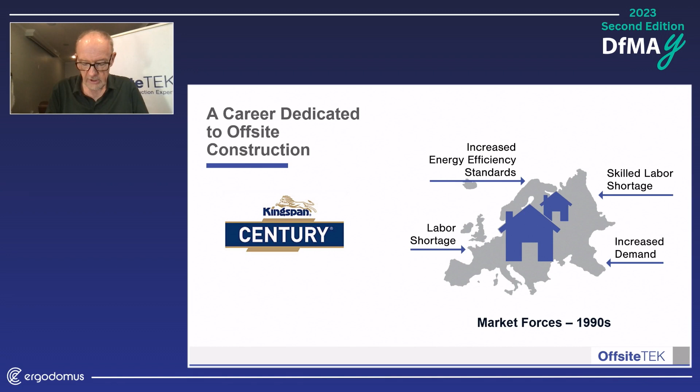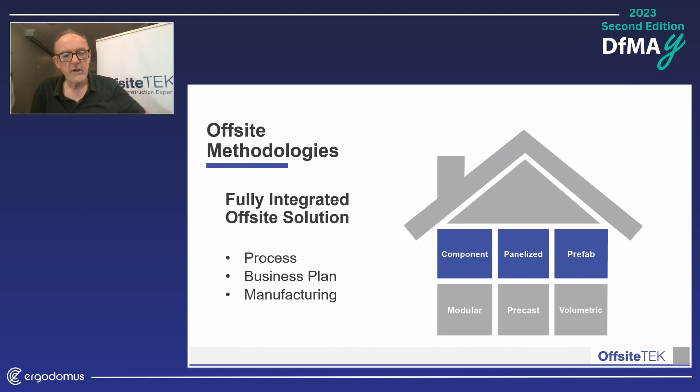What I'm talking about here, particularly the systems I mean, are the various offsite methodologies: component, panelized, prefab, modular, precast, volumetric. The area I really focused on is component, panelized, or prefab. You could put it all into that. What I've come to call that is a fully integrated offsite solution, which includes the process, the business plan, the manufacturing. You have to have the total system.

What's key to this, especially when you come back to design, and I emphasize design for manufacture and assembly, is that my experience shows 80% of the benefits of offsite construction are achieved before a piece of lumber is cut or processed or a nail gun is ever fired.

Because in reality, offsite construction is about process improvement. It's not about the components. But everybody focuses on the components because of the physical hard product that everybody sees. What you don't see is the work going on in advance, from the digital twin being produced to work out all the problems before you ever get to the site, to the planning with all the stakeholders before you ever go there, to working out the problems. That process improvement, that discipline, is actually what brings the benefit.

And again, that's what actually lowers the cost on the project. It's not the component itself, although obviously they're a key element of it, but it's that process improvement. That's where the cost savings are.

So when you simply compare material against material, it's very hard to make it stack up, whether it's mass timber or even light wood frame panelized, because we're not arguing the right point. You need to discuss the process improvement and the benefits that brings to the total project. So it's the total cost.

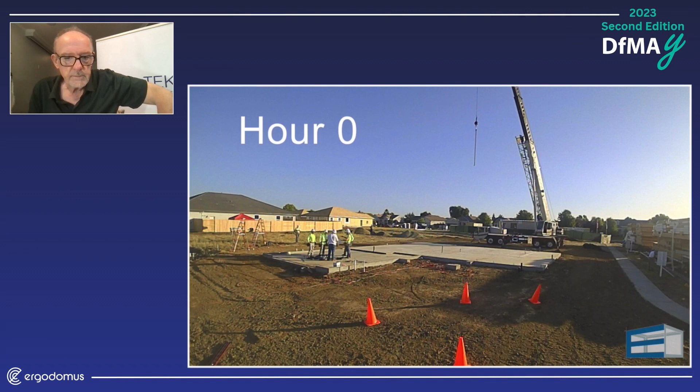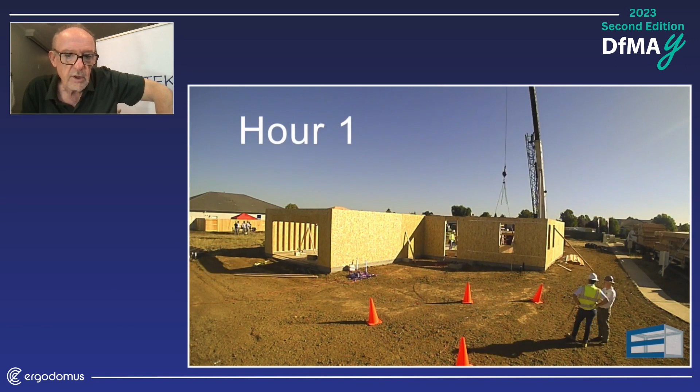So this is giving you an example, and admittedly it's only a two-story home, but just to give you an example: in the United States, this was the first home being built by this builder using a fully integrated offsite system. This house was 3,800 square feet, two-story. And you can see, at hour 1, all of the ground floor walls are up.

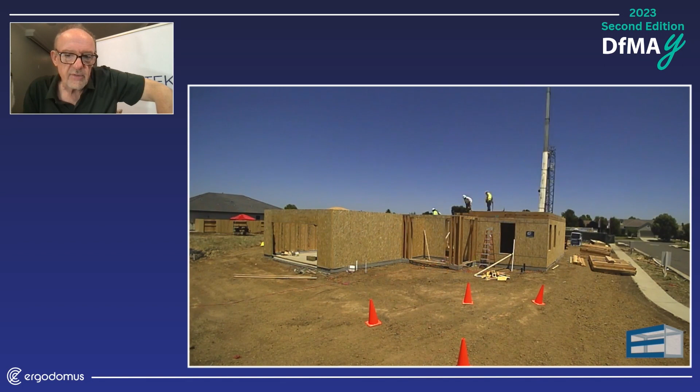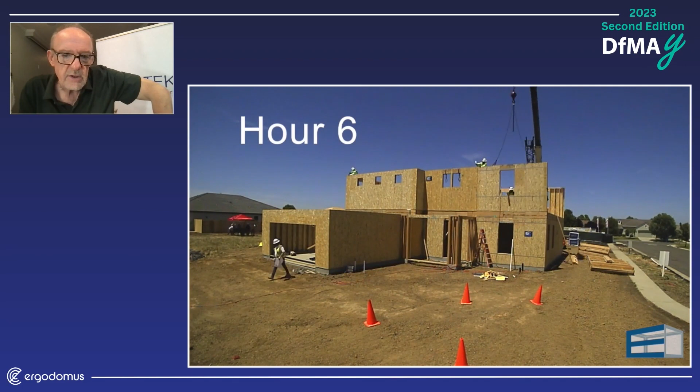Now you start to see the floor cassettes getting set in place at hour 4. Now they're setting the second floor panels up. By hour 6 in the afternoon, that house is at plate level. Look at the lack of waste around it. Look at the cleanliness of the site and the safety on the site.

So that house was 3,800 square feet of frame space. And in 3 days, that home was through shear inspection in the United States and ready for the follow-on trades. That is that building after 3 days. Now compare that with, typically, it would have taken 15 to 20 days in California to frame that building if you were stick framing it.

But more interestingly, I suppose, I want to run through this case study, which I think relates well to the costs. This was a project of approximately 270,000 square feet of multifamily buildings in Northern California.

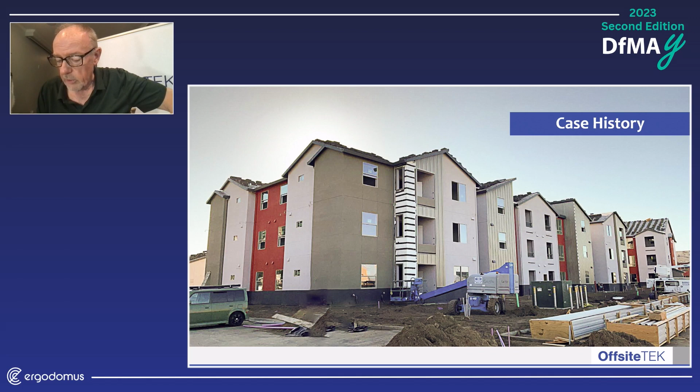So there were 232 three-story units, 272,000 square feet, 3 phases of construction. The stick framing cycle time provided by our competitor, using traditional framing methods in the United States, was 42 weeks to complete this job. And ours was 14 weeks.

So you can see a dramatic difference. We're not talking here about a small incremental difference, we're talking about a quantum difference in time frame on the job site, taking it from 42 weeks to 14 weeks.

And what's important about this is that when we bid this job, the developer had used the previous framer before, who said he could do it in 42 weeks. I actually don't believe he could, but that was the number he gave. He was $100,000 cheaper than we were.

So think about it, we went into this project $100,000 more expensive. But instead of arguing over cutting back on materials, we said to him, okay, we can do it in 14 weeks, your framer says he can do it in 42 weeks. What is that delta, that difference between 14 weeks versus 42 weeks, worth to you?

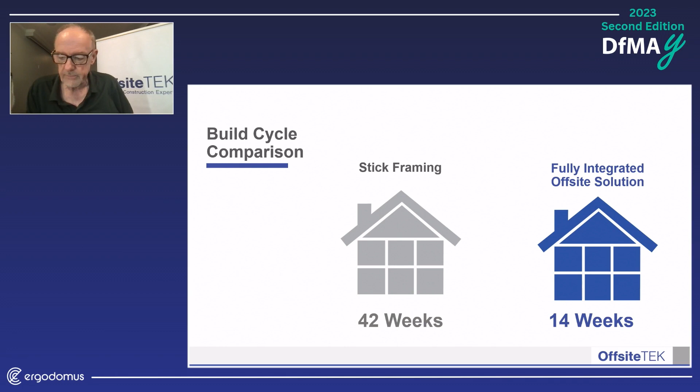So I'll come to you now at the end, I'll give you the number he actually gave us. But there are other improvements from using the offsite solution as opposed to simply using stick framing.

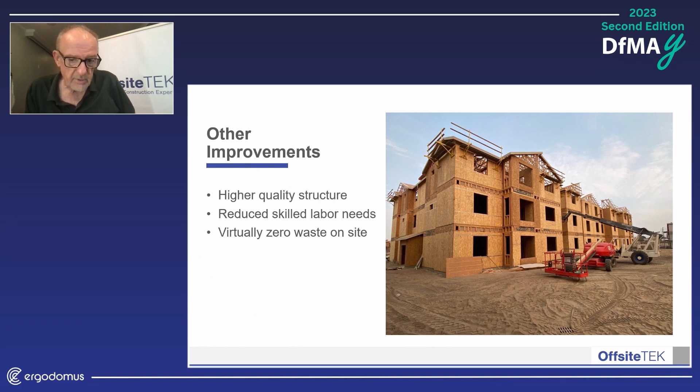He got a higher quality structure. He got reduced skilled labor needs, which in California, United States, at the moment is a major issue. He had virtually zero waste on site, which saved him a lot of money in terms of removing waste from the site, making it a more sustainable project.

And he had reduced insurance claims. His insurer gave him, again partly due to the fact that it was safer and he had less time on the job site, reduced insurance premiums. And he had no storage on site, which reduced the likelihood of pilferage or fire on the job site, which again impacted the insurance premiums he was paying.

So the savings realized - remember, we said we could do it in 14 weeks as opposed to 42 weeks, but we were $100,000 more expensive going into it. But the developer's own figures were that if we could do it in 14 weeks versus his 42 weeks, that would amount to a $600,000 reduction in costs to him.

So think about it, $100,000 more expensive, but if we saved him that time frame, it was going to save him $600,000. So we put it to him that if he gave us the job, we would do it at the same price as the stick framer, provided that if we produced it in 14 weeks, he would split the $600,000 with us. He keeps $300,000 and we keep $300,000.

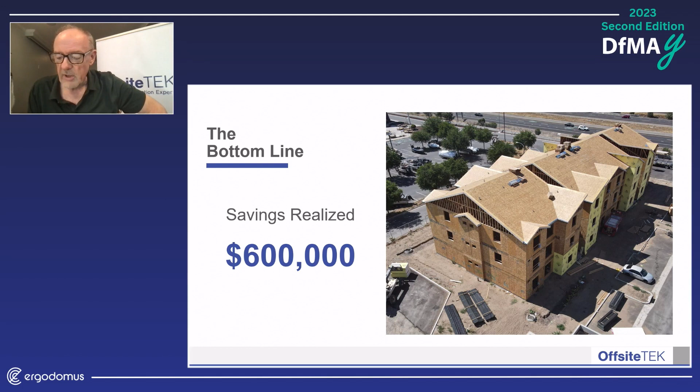So in effect, we get paid $200,000 more than our initial asking price. And he agreed to it, and he paid it. We then subsequently completed the second phase of that project, which was 172 units.

And the third one is about to start in October of this year, and that one was bid without a competitive bid because he sees the value and the speed from the offsite solution. Sorry, I know that was very brief, but thank you very much. Happy to answer any questions.

Wow, thank you Jerry, as always very inspiring. I will always remember: if it is not a system, it is not a solution. I really like this sentence, I will print it on paper to have in front of me on my desk every day.